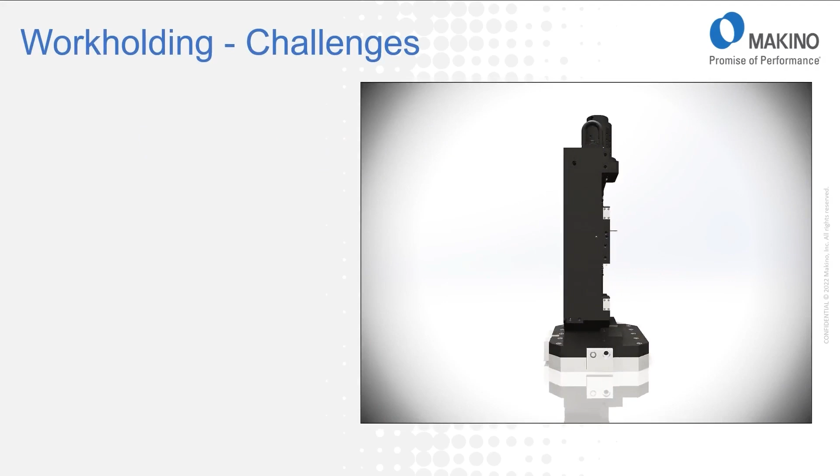So I'm going to go through a few examples of fixtures that we've used, designed in automated systems, to give you an idea of some of the virtues that they extol.

Reducing operations. On this particular fixture, you can clearly see that this is what we call a window fixture. A window fixture allows us to machine on both the front side and the back side of this part, so we were able to machine this part in one operation. Why is that a big deal? Less part handling, only one process stream. No matter where the part came from, it's only gone through one operation, so there's only one process stream to follow for quality.

Versatility in loading. In this case, this particular part was going to be automated, but wasn't going to be automated for the first 6 months of production due to the lack of availability of the robots. So the customer had to get up in production, but in the meantime, he needed to hand load these parts, have operators load the parts. We were able to accomplish that by taking into account the fact that both a human being and a robot had to load this part, so it's built into the works of the fixture. We'll talk a little bit more about part retention and things of that nature as I go on.

Built for automation. There's a lot of things I talk about in this presentation that are designed to be built for automation. But if I can give you guys one piece of advice, if you're going to have an automated fixture, you want to make sure that you're using double-acting hydraulics. What is double-acting hydraulics? It means that you clamp under hydraulic pressure, but you also unclamp under hydraulic pressure. In an automated system, you don't want to use single-acting clamps, which are advanced hydraulically and return with spring pressure.

What happens over time, coolant is sticky. If it gets on a part of yours and it sits over the weekend, it can gum up the shaft or the shaft seal connection, and eventually a clamp won't fully return, it won't get out of the way. If you're hand loading, the operator can just touch it with his fingers, knock them out of the way, grab the part, take it off, put a new part on. The robot can't do that. The robot's going to go in there, grab that part, try to pull it out, and if those clamps aren't returned, it's going to try to take the entire fixture with it. So double-acting hydraulics would be one suggestion under the built for automation category.

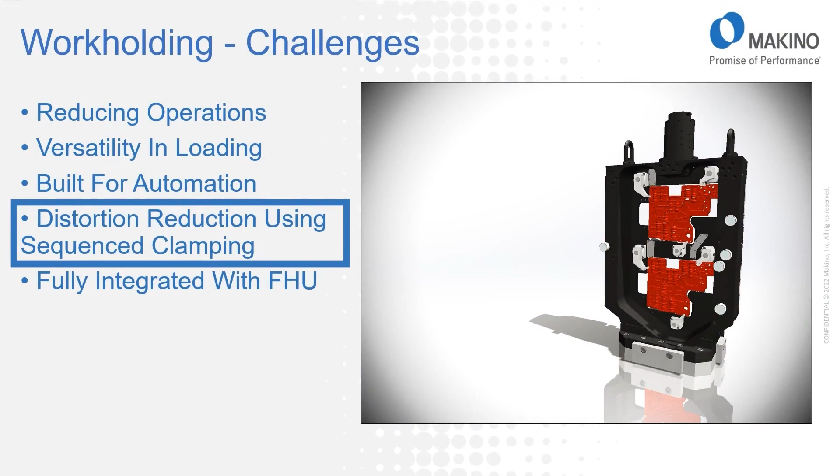I'll talk about more. Distortion reduction using sequenced clamping. On this fixture, on the next slide, I'll tell you a really interesting story of how we were able to do that. And of course, this fixture was fully integrated with the FHU system.

On this particular part, we had very small locating areas, very small pockets that we had to locate in. Again, we had to machine both sides of this part not at the same time, but in this one operation. These are 3,000 PSI capable clamps that are on the fixture. We saw that as we were clamping this part in those teeny tiny little areas, about less than a quarter of an inch in diameter, if we applied anything more than 300 PSI of pressure on that clamp, it distorted the part just enough that we couldn't achieve the 30 microns flatness that we had to have on the back side of that part.

All right, that's cool, we can adjust our FHU system down to 300 PSI. That's awesome. Well, those are 3,000 PSI clamps, and the minimum operating pressure is 700 PSI. So we dialed it down to 300 PSI, and sometimes the clamps would clamp and sometimes they wouldn't because we were below the minimum operating pressure. So what did we do? We got a little creative.

We put in a reducing system, an optional system that we put in there. We clamped the clamps at 1,500 PSI to make sure all the clamps clamped. We then dropped the pressure on that clamp line all the way down to 0. We didn't unclamp it, but we just dropped the hydraulic pressure down to 0. At 0 pressure, the part was able to relax back into its original shape. And then I could jack the pressure back up to the lower 300 PSI and clamp the part in place because the arm had already swung at 1,500 like I told you. At 300 PSI, we were able to reclamp the part. That was enough force to hold the part in there when we machined it, and we were able to get the distortion out of the part.

Now, if I didn't have the FHU, I'd be in a world of hurt. This is an actual case scenario where we had to do this on the fly. With the FHU, it allows you to be flexible. It allows you to get out of trouble that you've inadvertently gotten yourself into. In over 29 years, I've gotten myself into a lot of trouble, and it's a tool that can help me get out of it pretty quick.

One more thing about differential pressures. We also had another case, not this particular fixture, but multiple cases actually, where we needed to clamp a part at 3,000 PSI to take off the heavy amount of stock we needed to. But once we got through all that stock, and we had a tight surface finish, flatness, or roundness requirement, we can, in the work zone, unclamp the part and reclamp it at a lower pressure to do finishing. So we clamp at a higher pressure for roughing cuts, then unclamp and reclamp in the work zone at a lower pressure to do our finish cuts, reducing distortion. Again, another way the FHU bailed us out of a situation we were in.

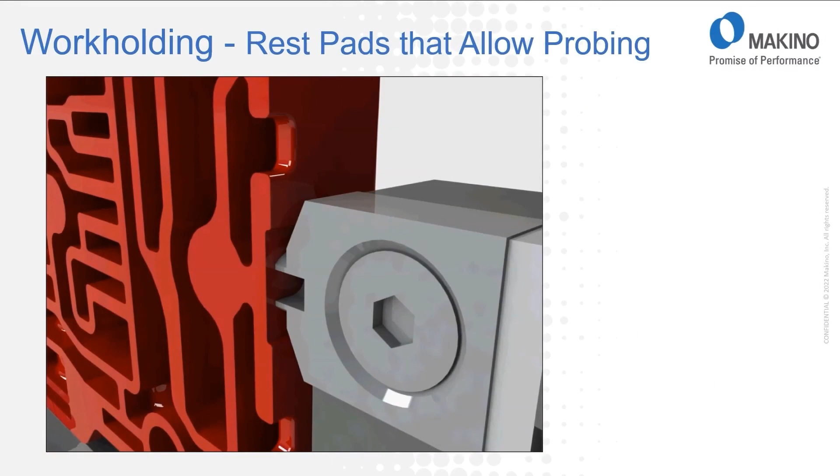This particular fixture as well had a customer who wanted the ability to probe his secondary and tertiary locators. The reason is, as we all know, machine tools never get crashed. But he wanted the ability, once a month, to go in and check the position of the part relative to the zero on the fixture, to make sure the part hadn't been crashed, or the machine hadn't been crashed. And if the part moved for any number of reasons, he could adjust the offset to correct the part position.

We're also working with a customer right now that has a cast iron part, and we're going to be machining a series of bores in line with the part. The problem he's having is that he currently makes his part on another set of machines, and the parting line goes right down through the center of that bore. So he's getting a lot of shift from one side of the casting flask to the other. His fixturing points are solid and good, but depending on which mold or which day, and how much shift occurred, he machines parts all the way through the process only to find out, once he takes them off, they're not cleaning up on part of the diameter. So what we're doing is using the fixturing in the same way, but adding a machine probe option. We probe that cast bore on every part and offset the program based on the data from that probe, centering on the shift to give the machine tool the best opportunity to put that bore directly on center.

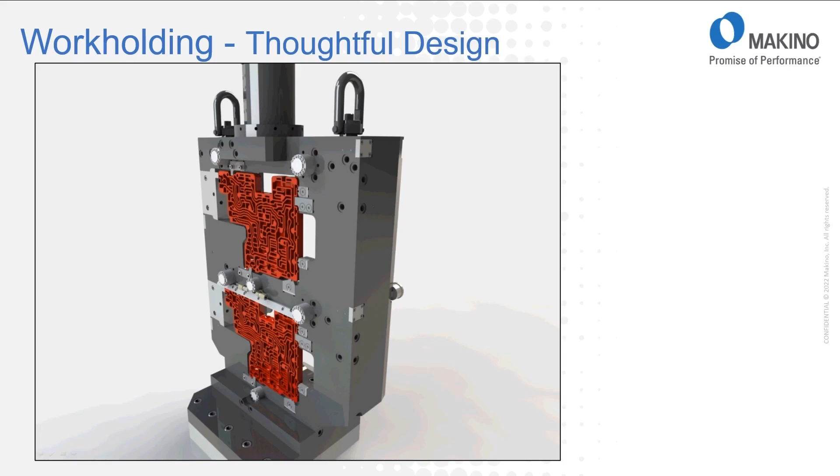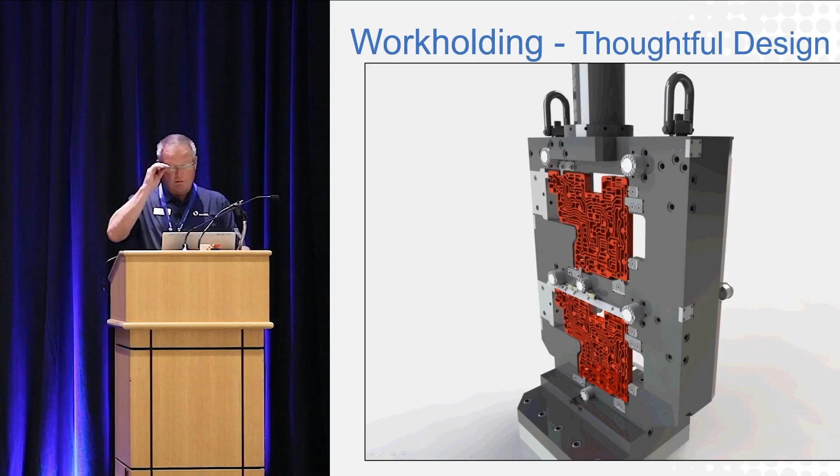Going back to this part here, thoughtful design is a nice way to put it. It's collaboratively done between the application engineers and the work holding team. We had to hold that surface flat within 30 microns, and there was a visual specification requirement too — no step over allowed, even if you couldn't measure it. You can't just take a small mill and buzz back and forth; if you can see a line between the tool paths, that was unacceptable to the OEM. So we had to create a fixture that allowed a mill to come in Z, walk all the way across the part in X, keeping the tool off it before and allowing the last tooth of the tool to come off. Notice there's nothing protruding out of the fixture where the red part is — anything that protrudes is above and below. That created some challenges with the way we're clamping. Those circles sticking out are actually the back end of those cylinders, so we had to get creative to make this a one-operation process.

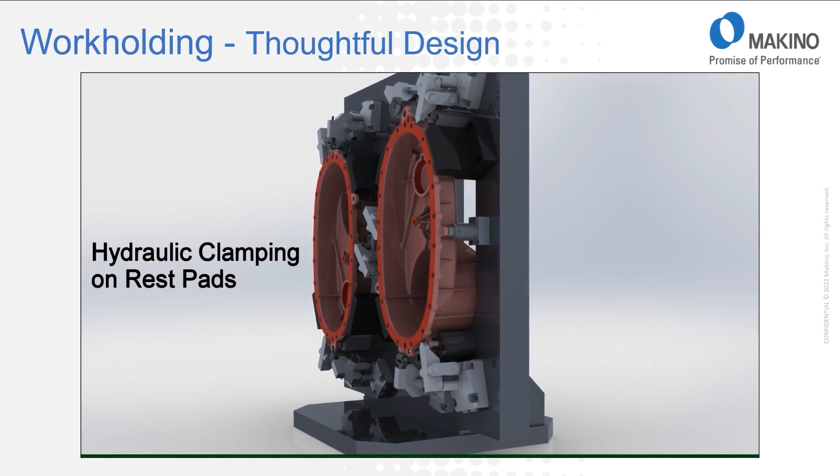On this particular part, we've incorporated part loading guides. Basically, those allow the part to be guided onto the locator. Even if you have automation bringing it in, especially if it's grabbing on cast areas of the part, it's not always consistent. So we have load guides that direct the part to where we want it to be, as close to its final place as possible when the robot lets go.

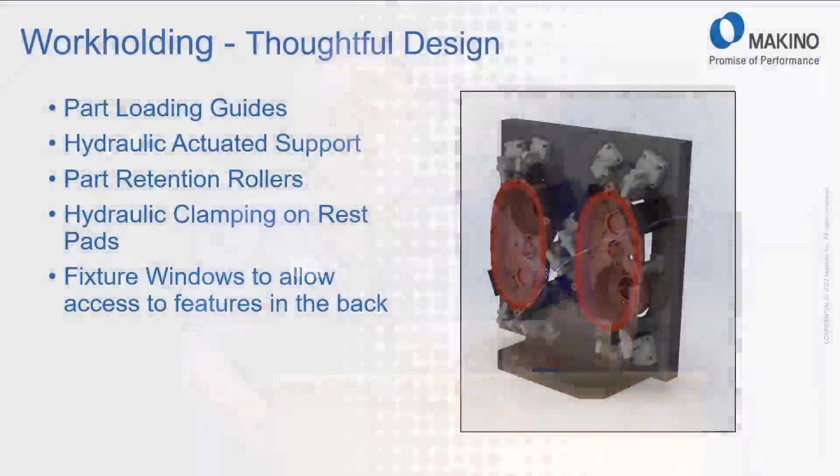These parts are 180 degrees from each other, same part, with the right-hand nest and left-hand nest opposite one another and two link clamps in the middle. This was done on an A61NX. If both parts were in the same attitude, one link clamp would have to be on the outside and one on the inside. The tombstone is very wide relative to the pallet base because we had to keep the fixture within the work zone of the A61NX. Otherwise we'd need the larger, more expensive A71NX with more floor space required. So creatively, we solved it by rotating the parts 180 degrees.

Those load guides also act as a poka-yoke. Even though the flanges of those parts are perfectly symmetrical top to bottom and all around, making it easy for an operator to load upside down, the load guides have poka-yokes built in that won't allow incorrect loading.

We talked about hydraulic actuated work support at 3,000 PSI. We had to employ that here too. On the right-hand nest, about halfway up, there's a hydraulic work support underneath. The two locators were too far apart, and our cutting tool force bowed the part down, so we added a hydraulic work support in that area.

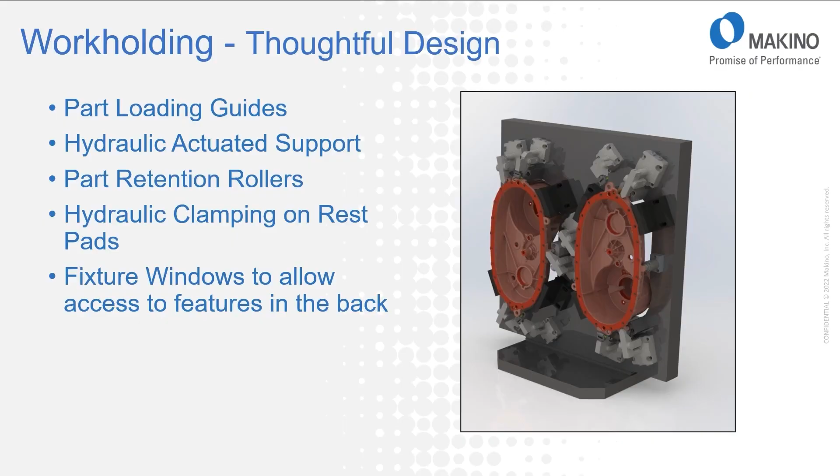Hydraulic clamping on rest pads is the meat and potatoes of hydraulic clamping. My suggestion: always have the clamp directly over top of a locator. Tell product designers that if you can't clamp over their locators, you're going to struggle making parts, because the clamp not being over the locator will bend the part. If I apply pressure directly over a locator through the part, I can't distort it, but any kind of lever arm, no matter how far from the clamp, will want to pull or push the part around. So clamp directly over top of those rest pads wherever you can.

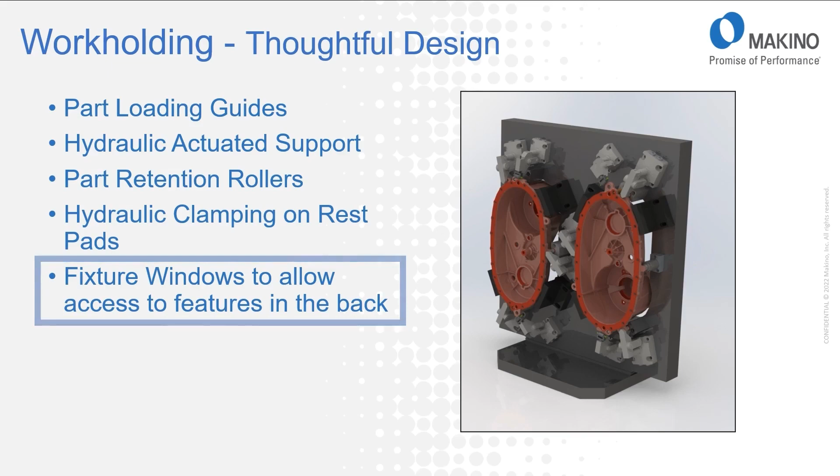There's a window to allow access to features in the back, which was key here because the bores you see on the lower right-hand nest are bearing bores on the inside, and on the 180-degree side there's also bearing bores and seal bores. The concentricity between those features, if done on two operations, would require two different setups, creating a tolerance stack and making statistical capability much harder to achieve. Being able to bore, index, and bore allowed us to achieve higher quality.

Preventing load failures would be a good thing. In an automated system, we want the robot to drop the part off without ever having a load failure, but a robot alone can't guarantee that. So we employ air detect, using those pneumatic lines on the rotary unions. I'll show you what air detect looks like next, but basically it sends air through the rest pads, building up back pressure that a sensor reads to tell us whether the part has been seated or not.

Part retention: whether the robot or a human loads the part, we want it as close to the locators as possible, ideally sitting right on them. So we design part retention using spring-loaded devices. You can buy them commercially, but they're not very good, and I've yet to find a commercial retention device that lasts in our environment with the coolant and chips. So we design most, if not all, of these ourselves. The idea is to use spring force to push the part against our locators, so if you imagine yourself as a robot, you take the part, put it in the fixture, and snap it into place.

It wants to snap into place so it hits against all the locators. Ideally, when the clamps come in, we don't even want to see the part move because it's already on the locators. All the clamps are doing is adding holding force to where it's at. But that takes a little bit of work, and you're not going to find any of those in a catalog somewhere that you can buy that are worth a hooey.

Clamp confirmation: we want to make sure in an automated system that our clamps are open when we want them open and closed when we want them closed. The way we do that with the FHU is we have pressure sensing. We can tell when the clamp pressure has been made on each and every circuit. We monitor each and every circuit individually. So we know when hydraulic pressure is made on the clamp side, we know when it's made on the unclamp side.

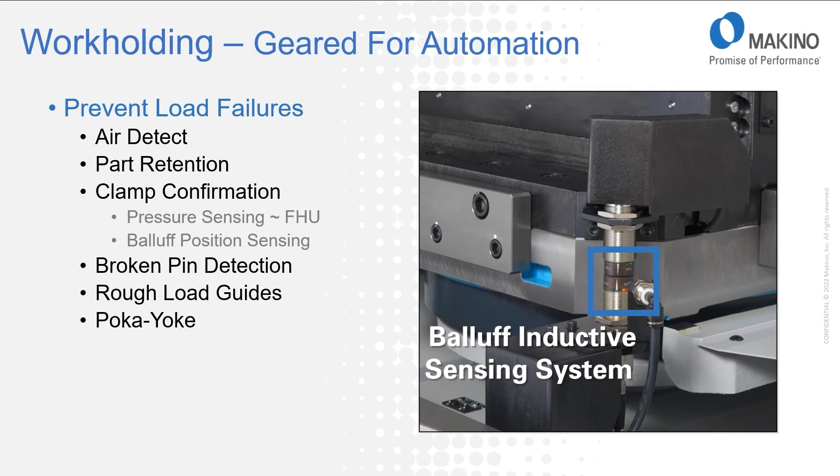What you're looking at here on this screen, these two cylinders directly on top of each other, this is a Balluff inductive sensing system. The bottom cylinder is permanently mounted to the machine itself, the top cylinder is mounted to the fixture itself, and there's a 1 millimeter gap between the two. What I can do is inductively send power - they do not connect, there's a gap. I can send power from the machine tool into my fixture with enough power that I can run 8 proximity switches on the inside of that fixture. So I can have dogs on my cylinders that physically move back and forth, and I can detect whether the clamp is closed or open with proximity switches. So I then have physical confirmation that the cylinder has moved from position A to position B.

We have very few customers that use it, but they insist on it. Most of our other customers, we use the pressure sensing.

Another thing we can do with the air detect system is broken pin detection. So you've got the part seated up against the rest pads, everything's solid there, the clamps are engaged, everything's good, but yet you made a bad part. Well, how did that happen? When you put the part onto the locating pins, one of your locating pins was broken. Your diamond pin, let's say, was broken. So you're not getting that tertiary location, the rotation location. How many parts are you going to make before you discover that pin was broken?

There's nothing on the machine to detect it, but we can put an air line or air feed into those pins, have the pins be somewhat hollow, so that if a pin breaks off, we will be able to detect that by the loss of back pressure on that air. Once that pressure drops below a certain level, it tells me there is a broken pin on this fixture somewhere. It needs service, it needs intervention, and we will not allow that fixture to pallet change into the machine to make bad parts. That's just another creative way you can use air detection.

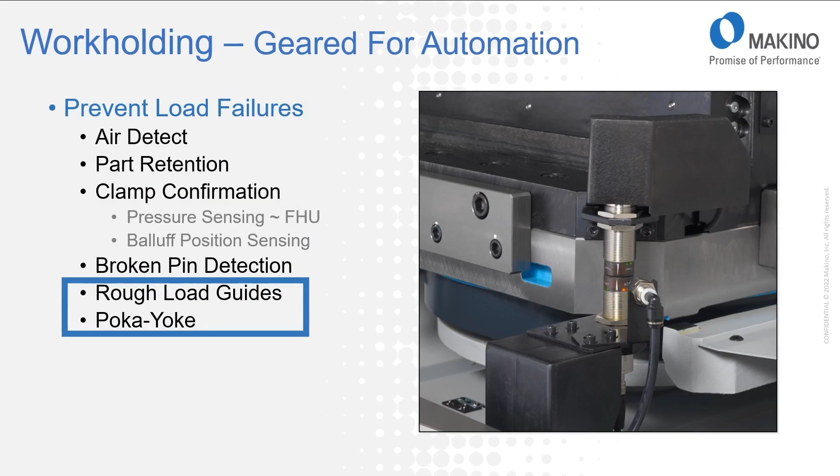Rough load guides and poka yoke, we talked about that. All these types of things, stacked on top of each other, is what I talk about as geared for automation - building the fixture for automation so it's robust.

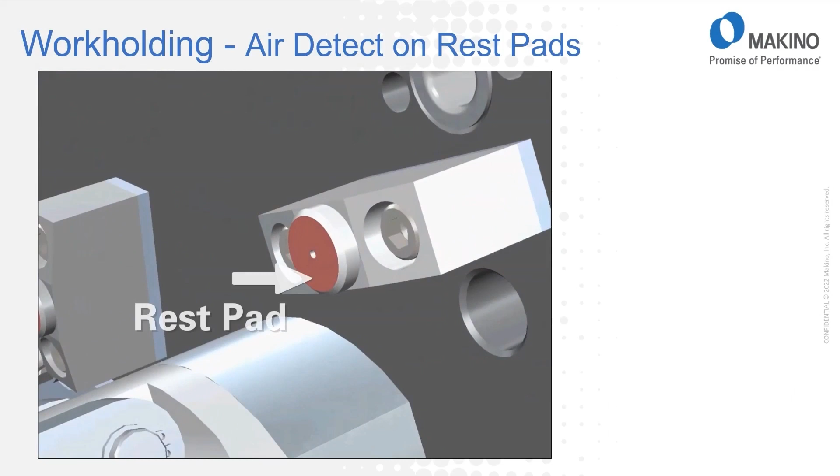Going back to the air detection, the rest pads, which you're looking at here - what we have is a rest pad sitting on a surface, and that's a 1 millimeter diameter hole that we squirt air out of, if you will. As the part comes over top of it and is clamped, it seals off. It doesn't fully seal it off, right? Especially on a cast part, the cast part has some waviness to the surface, so it's not like you can seal it off and put soapy water on it and not get any bubbles - there's going to be air escaping from it.

So again, we use a pressure differential switch to determine whether the part is clamped or seated against the rest pad. When all the rest pads are open, you've got free-flowing air going through those 1 millimeter holes. There's a certain pressure threshold we look at. When we have a part that goes on there and we know there's no chips and it's solid, there's a certain back pressure we see - the difference from open to closed. That's what we're looking for in these scenarios.

So going along with this, take a look at the size of that chip that's on a human finger there. So what are the potential costs of a chip on a locator?

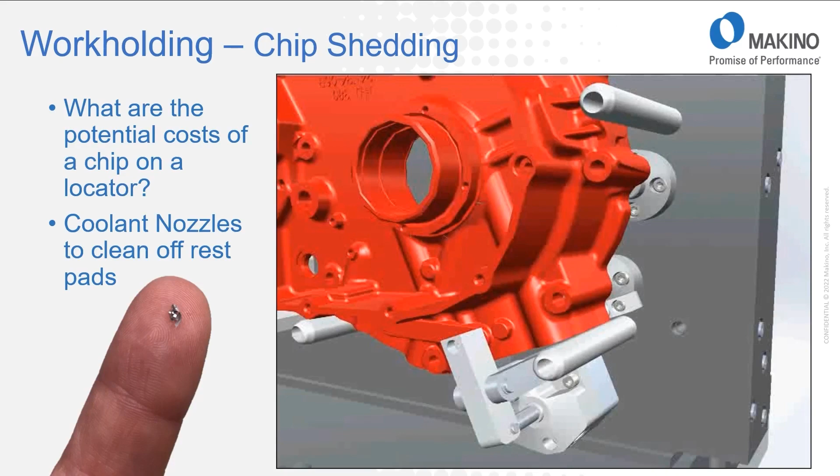We use coolant nozzles with through-fixture coolant in addition to, or in combination with, those air detect locating points to blow through on the locators. If used properly, we can detect a 10,000th chip being on one locator. We are able to detect that there's a 10,000th gap between the rest pad and the part.

Now, why did I say if used properly? We have some customers that want to put 12 or 15 parts up on a fixture. They want to use one airline to check 12 or 15 parts. You've got 3 rest pads per part, 36 to 45 rest pads. With that many holes, that many orifices, you can't detect a small chip, right? Again, you're looking for a pressure differential. So if you've got 36 orifices with that air flowing through, you're not going to be able to detect as fine a chip as you could by having one airline per set of pads, okay?

So you look at it, it's a positive, but you have to be careful how you use it. You can't have too many lines, too many points, rest pad points on each pneumatic line. And of course, it depends on whether the part is as-cast that you're sitting on, or if it's a machined surface that you're sitting on.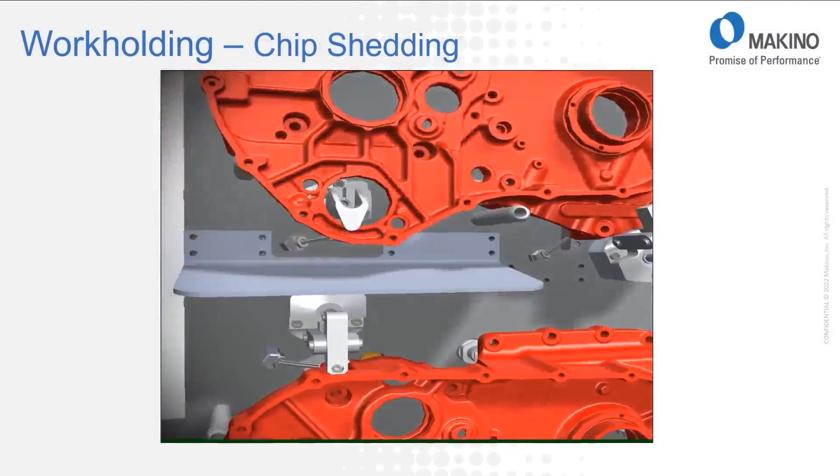Chip shedding, another thing that we can't stress enough. The ability to get chips off the fixture in an automated system. You don't want chips on rest pads. You don't want chips on locating pins.

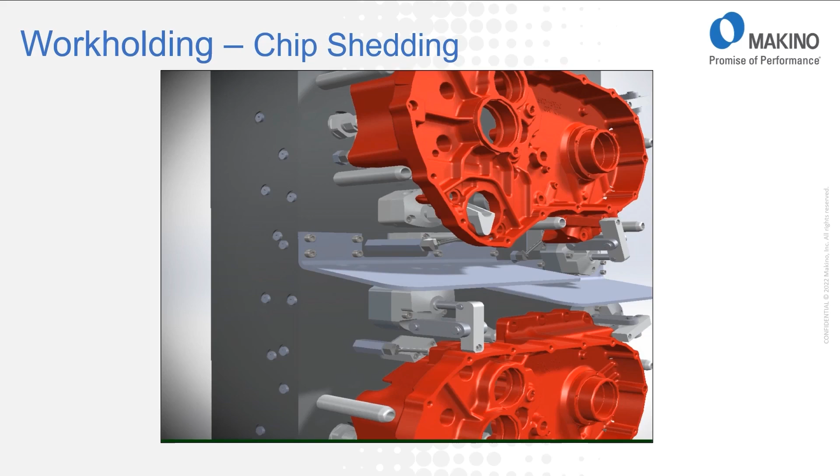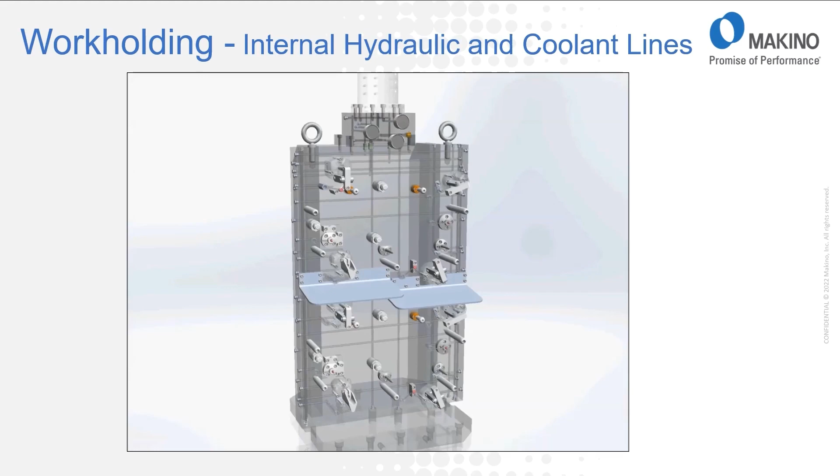I want you to notice, from a chip shedding standpoint, on the areas of the part where the part is located, upper and lower, there's not a single horizontal surface anywhere. Everything's got an angle to it, or it's round. The idea behind that is when chips hit it and coolant hits it, it rolls down off that face. A horizontal flat surface will allow chips to gather.

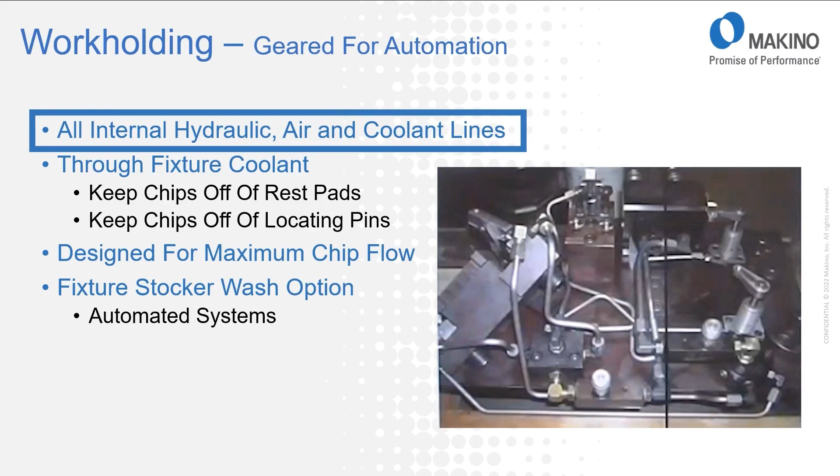Another thing we always want to see on automated fixtures, we like to do this on all fixtures whether automated or not, is we want to internally plumb the hydraulic, air, and coolant lines. What that means is there's no plumbing. It's all gun drilled. We don't want to see any piping of any kind on fixtures, because anytime you have piping, it just attracts chips.

They bird's-nest on this plumbing. Not to mention, if you get a little too close with a tool, you could split a fitting open, you could split a line open and lose hydraulic pressure. So you won't see any of our fixtures with external air, coolant, or hydraulic lines.

Through-fixture coolant, we employ that to keep chips off the rest pads. We employ that to keep chips off the locating pins. We spray across the rest pads. We spray at the locating pins to make sure that we have chips removed. Designed for maximum chip flow, we want to make sure that the chips get off the fixture as efficiently as possible.

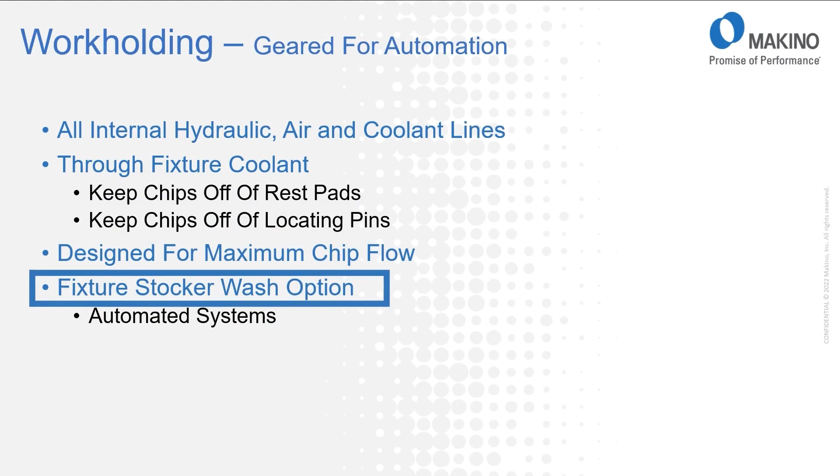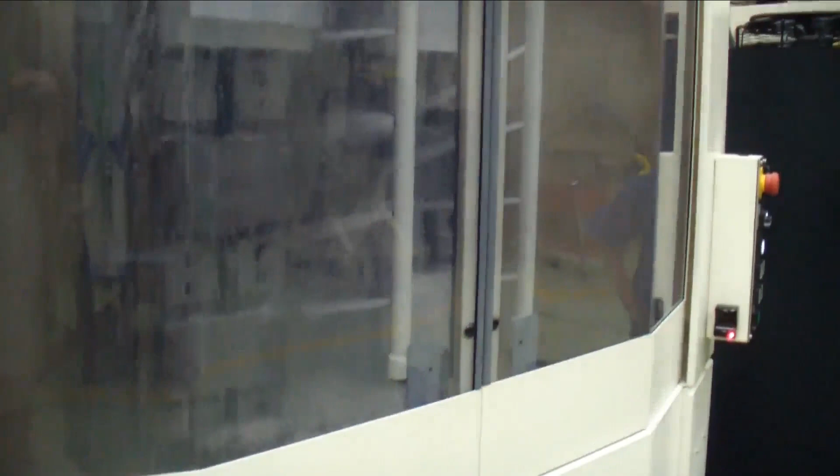And the last little thing I want to talk about, the fixture stocker wash. What that is: after the robot unloads the parts out of the fixture, the doors close on the front of the stocker stand, and we have vertical coolant pipes with multiple nozzles in them, and we bathe that fixture in coolant. It just absolutely fills that whole area with coolant and knocks any remaining chips off the fixture. Doors open back up again, the robot loads new parts onto a clean fixture. So we use stocker wash in combination with through-fixture coolant to keep the fixtures clean.

The use of automation is growing into different applications. You need to understand the requirements and goals of the automation, determine that, have an idea of where you want it to go. Evaluate the available types of automation to determine the best fit for the requirements. Evaluate the features of the proposed automation system, machining centers, and work holding systems as they pertain to the goals of automation. If successfully implemented, machine utilizations of 80 to 95% are achievable, and our customers do see those types of utilization rates.